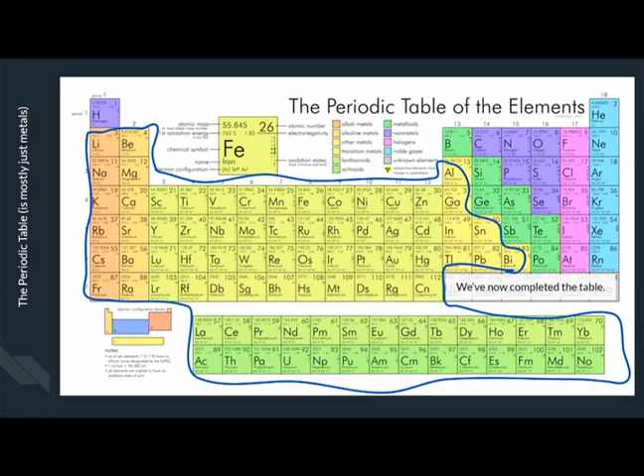There's 118 elements on the periodic table, and this is me, the chemistry teacher. Can't resist putting one of these up here. The periodic table is mostly metals. And so I drew this blue squiggly line just to outline sort of the section of the periodic table that's definitely metals. Then there's this green region in between here that is the metalloids. There's a whole category for metal-like elements, and if you're remembering your high school chemistry, that's sort of where we're going for this first little intro bit. But all of these sections, they would definitely fall into the metals class.

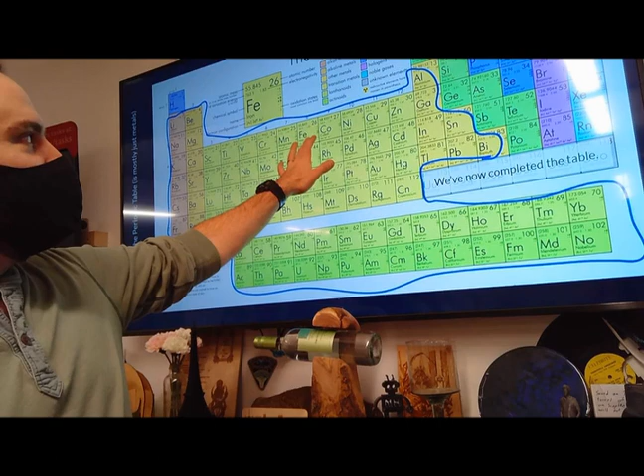So everything in that section, that's going to be the things that we know and love. There's Fe, which is iron, cobalt, nickel, copper, zinc, silver, and gold. And silver and gold are maybe backwards from what you'd expect them to be. Silver is the one with the G, gold is the one with the U. All of those metals that you're used to, even some of the weird ones that you've heard about. Calcium is in your bones. It's a metal that's in your bones. Potassium is necessary, and sodium levels are important to get your brain to work the right way. Those metals are important for moving things around between your neurons.

All those metals are important parts of you and the body, and the way that they work interacts with lots of the stuff about us. But identifying a metal is often relatively natural, something we don't have to think about too much. But identifying which metal it is often more subtle. So it's good to know there's lots of things in the world that are metal. When you think about our planet in general, there's a giant iron core at the center. So in terms of how much of the world is metal, it's a lot, there's a lot of metal on this planet that we're a part of.

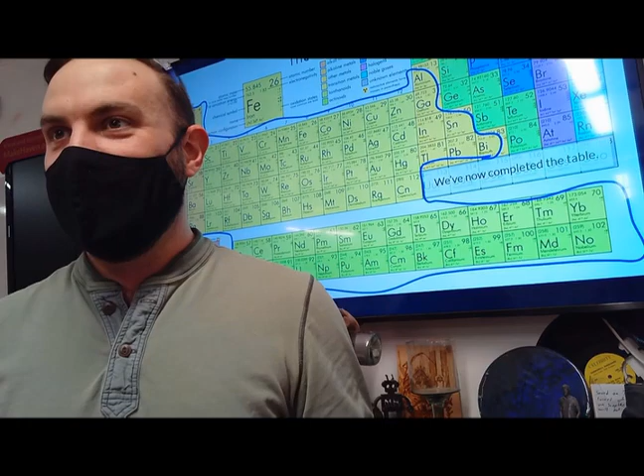If you were watching the news this week, they made a big hullabaloo about an asteroid in the asteroid belt worth 10,000 quadrillion dollars if you could bring it to Earth and mine it for all those metals. But they made a good point that if you actually brought it down to Earth's surface, you'd immediately shut down the economy for each of those metals because we'd have more than we'd ever need. So it's fascinating to think about metals in context, their rarity, their commonality, and how they exist in the universe, the fact that all these heavy elements came to us from the blast furnace in the center of stars. A little bit of context is always fascinating for where these things come together.

But we're going to talk mostly not about the origin of metals, but how you use them and how they fit together. So it's good for us to describe a few things about metals, and the most common of those is iron and steel. There's a whole field of metallurgy that there's no hope for us to get close to understanding in the scope of this course. But there's this giant graph where you take the temperature in Celsius versus the carbon content of some iron, and that determines what exact flavor of iron or steel you have and how that dynamic works.

Then you can think about this in a giant smelting forge scenario where you've got huge amounts of molten iron that you're going to cast into things. You can think about it on the microscopic level where you've got domains and grains that can align or disalign to make magnets, which might sound familiar all the way back from high school chemistry. And then there's the blacksmithing realm, which ultimately we're not going to get too far into.

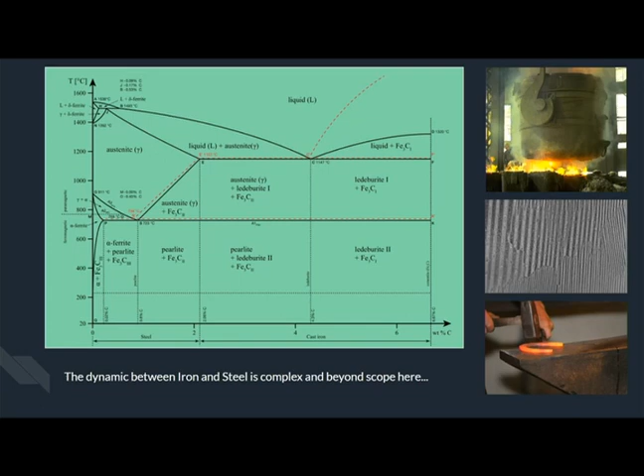It sounds like someone's got a question. That sounded like an unmuted person. A question about this? I'm in, is that anybody? I think someone just joined by phone. Oh cool, is there a question? Oh, we don't, yeah, we'll keep going.

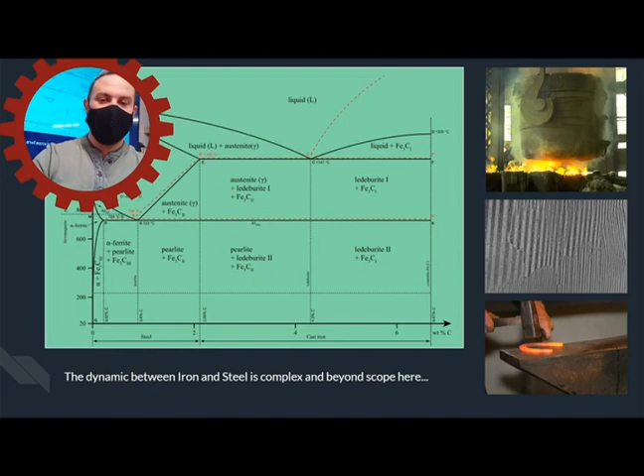The big thing I want to point out is that right now, blacksmithing has become super popular in the pop culture of the world. But as of right now, I don't think there's any real blacksmithing gear at MakeHaven, so that may be a growth area, but we're excited to think about those things. We're mostly going to talk about shaping and machining metals for cold cutting instead of hot forming metals, so that's important to think about. There's a kiln on order that might be available to do a number of things, including heating and cooling metals for a tempering and annealing process. That kiln probably won't make it in time for either of our two metal shop weeks, but it's something to think about down the line for ways you can work with metals even further.

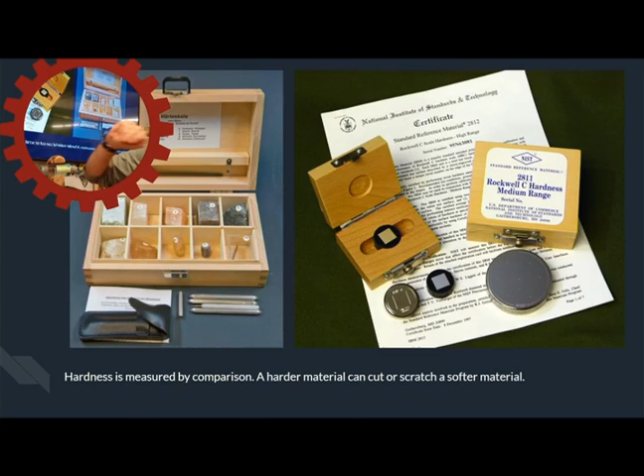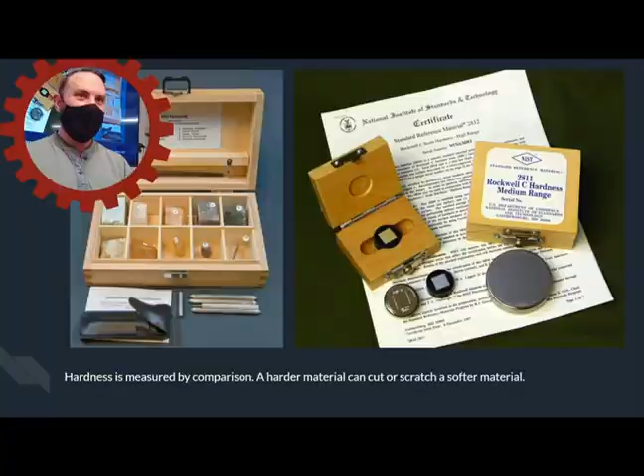If we're talking about metals, there's a few properties worth commenting on, and one is hardness. Hardness is often part of our definition of metals, that we think of them as hard materials. So defining hardness is important. There's even an official scale for hardness, the Rockwell C hardness, or this National Standards Reference Material Hardness Scale, where you can compare hardnesses. If you did college or high school geology, you might remember a hardness lab where you scratch rocks across stone, and some scratch really nicely and others don't scratch at all.

There's a vernacular that nothing is harder than a diamond, that's the hardest material, which means the diamond is going to be tough enough that it will scratch anything else you put it up against. Whenever you're talking about hardness, it's a relative measure. It's how much can you scratch something else is really what we're talking about. So it's an important piece.

It also means when things are harder, there's other implications to that. Having a molecular structure that's really self-reinforcing, really self-stabilizing, builds up hardness and makes for harder things, which is often one of the most identifiable parts of metals.

Now, there are metals that are super soft, like lead. You can bend it with your hand. Or if you're talking about gold, the iconic way that someone would test for a golden nugget in an old-timey movie is they'd bite it, because pure gold is soft enough that with a bite you can deform it.

So there's lots of different things that happen with hardness. For metals, there's some that are very soft, and there's even a few that are liquid at or near room temperature. Mercury is a prime example of the liquid metal. Gallium is another one that's fun, and it's at least not very toxic. You can order it, it comes solid, and if you heat it up, you can get it to melt in your hand. There's some good videos of people playing around with those.

Yeah, I don't know, it did a little hiccup. Oh, there we go, we're back? Okay, cool, cable disconnect, we're back on it.

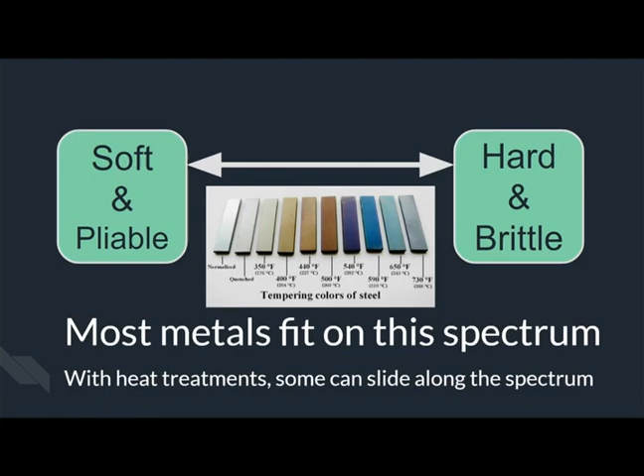I used to have a ring that was tungsten carbide, the hardest ring you can get fundamentally. It's not necessarily the safest ring to wear because they can't cut it off if you have to go to the emergency room. I was told that if it ever broke, it would shatter. So a very hard material will often also be brittle. It may be very resistant to breaking, but when it does, it will chip off and pieces will shatter. It can be a very brittle material.

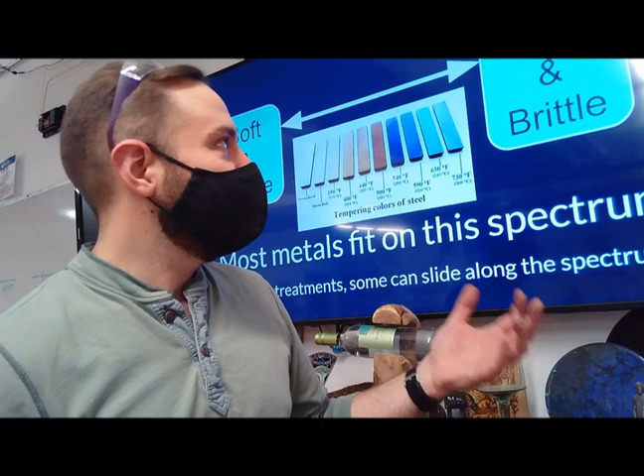Whereas a softer material, you're not as strong, but you get a little bit of motion, a little bit of ductility, some malleability. It will stretch and give before it fails. That little bit of plasticity is often very helpful when you're talking about having materials. So the dynamic between soft and hard is something you want to consider when thinking about your metals and materials this week.

Interestingly, iron and steel is one of the most fascinating on the spectrum because you can actually modulate how hard or soft it is to get the dynamic you want. In a knife, you may even have regions that are harder and regions that are softer. You may want a very hard cutting edge, but the back of the knife to be softer so it can withstand a little bit of flex. On a very high-end piece of material, you can even play with that dynamic some.

But for a lot of metals we might use here, we're going to talk more on the softer side. Like a piece of brass is going to be relatively soft. Aluminum is relatively soft. There's lots of different metals to consider. So I made a list — a big list with lots of words all on one slide. I'd recommend coming back to refer to it if you ever want to. These are probably all metals you know and love: aluminum, brass, copper, pewter, nickel, titanium, zinc, and then the ferrous metals, iron, steel, and other steels.

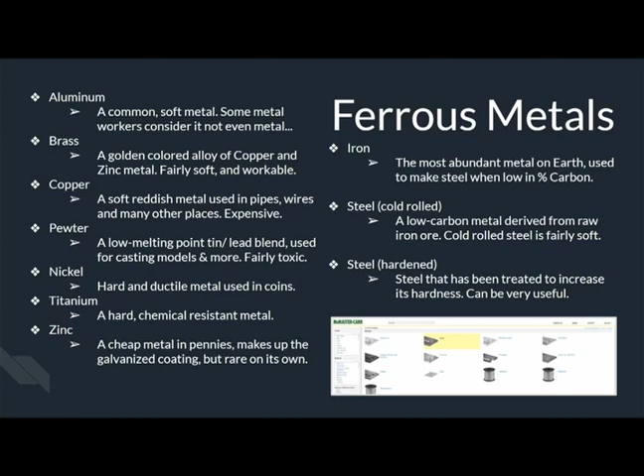But if you ask a metal worker, they may not consider it a metal, sort of like fish is not considered a meat on many menus. It's still definitely got eyes that looked at you if it was an animal swimming around, so I would categorize it as a meat, but most menus separate fish from the rest of the meat. Aluminum falls into that category: yes, it's a metal, but it's very different from others. It's a common soft metal.

Another thing that's interesting about aluminum is that it's extracted with an electrical process that used to make it very expensive. The top of the Washington Monument is actually capped with aluminum because at the time it was more valuable than gold. Since then, it has become sort of the garbage metal, right? You can make a beer can out of it, and then they're disposable, or you get 10 cents for recycling them. Those pieces of aluminum make it very interesting and appealing as a metal.

It's also very soft, very shapeable. Aluminum foil works well because you can bend and squish and stretch it, and it doesn't break. It's got a lot of plasticity. It's not a very hard metal, and you can cut it with basically a perfectly sharp wood tool. It's soft enough that wood tools work just fine on aluminum, although you may want to do it without the woodworkers watching you use aluminum through the wood shop tools. So you got to be a little careful with that, but it is a soft enough metal that you can cut.

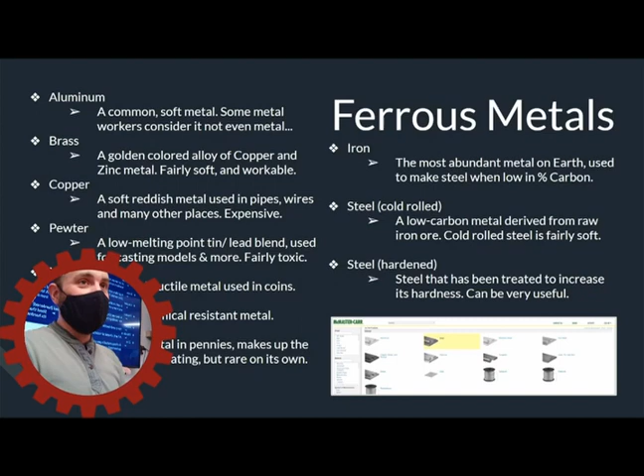Brass is another well-loved one that's similarly workable in woodworking projects. It's a nice inlay. A brass inlay can add a really nice color. It's that golden doorknob that we probably all saw from houses built in the 80s - the brass doorknob piece that if I get a chance, I replace in any building that I occupy.

But those are fairly soft, workable. They've got a nice feel. Some people really like the touch of a brass material because it doesn't wick the heat away from you immediately. But it's a blend of copper and zinc.

And so copper is the next one on our list. Copper is that orangish color that the pipes, many of the pipes in MakeHaven that carry around compressed air, are using, or pressurized water. Plumbing has been made out of copper pipes for a long time.

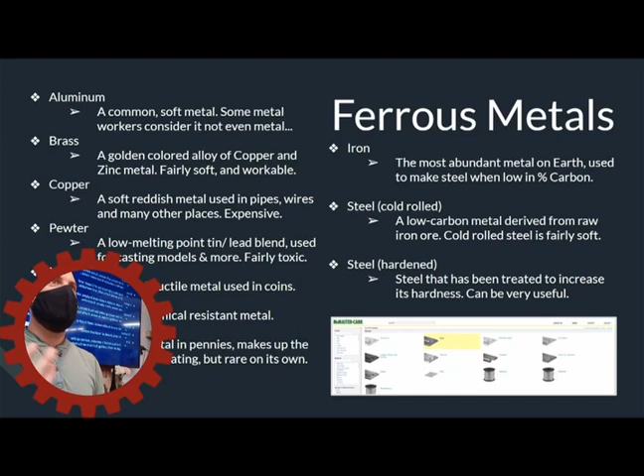Since we stopped using lead. In ancient Roman times, they used lead, which is where its Latin term plumbum even comes from. But copper plumbing has been around for hundreds of years, or at least 100 years easily, and it's a well-used material for that.

It is pretty valuable at this point. So if you've got an abandoned house with copper pipes, I'm sure you've heard of people going into those abandoned buildings and stripping out all the copper piping just to scrap it and sell it for a little bit of cash. So those are all things to take into account. But it has a very nice look - I really like the look of copper.

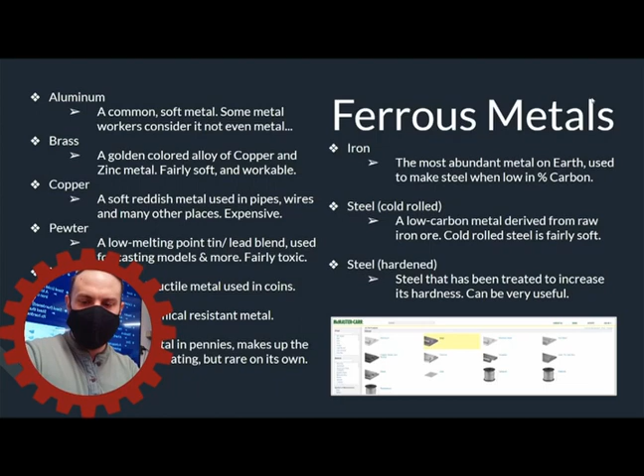Pewter is another one if we're going alphabetically. Pewter is a low melting point tin lead blend. Lead, by the way, is toxic, so I didn't put it on the list. But pewter is often used for casting, and a lot of old kids' toys had pewter in them, where you had a mold, and they would cast molten pewter, and you get a fun pewter soldier shape. Or a little car that was made out of pewter where they could cast them and then create them one after the other. Pewter is a soft metal.

It has a low melting point. The Monopoly pieces were pewter at first, right? And then they stopped because of the lead. Now they're plastic, right? Or no, I think they're metal still.

I mean, I guess the last time I really interacted with a Monopoly set, I was probably like 10. Yeah, no, the last time that any of us have played Monopoly was when we were all 10. So if somebody else knows what the current set of Monopoly pieces are, maybe they're brass. I don't know, that's reasonable. But there are lots of metals that you can use.

Pewter is one that, back when I was in high school, my art teacher - and I think she knew it was bad - had an opportunity for her oldest students to work with some pewter and cast things. So it's a neat metal if you ever get a chance to work with it, although it's probably not on the list of approved MakeHaven things just because of the lead content.

I would need to look before I get too committed to making a statement, but titanium is probably not toxic, it's definitely antimicrobial. So there are those pieces.

Sometimes they do that - like there are IUDs that are copper, and those disrupt the body's process in certain ways, and you can have terrible responses to them if you are allergic to copper. So the dynamic between a metal and a person's body can be complicated, but if you're thinking about integrating a metal in your body, it's something you need to deeply research.

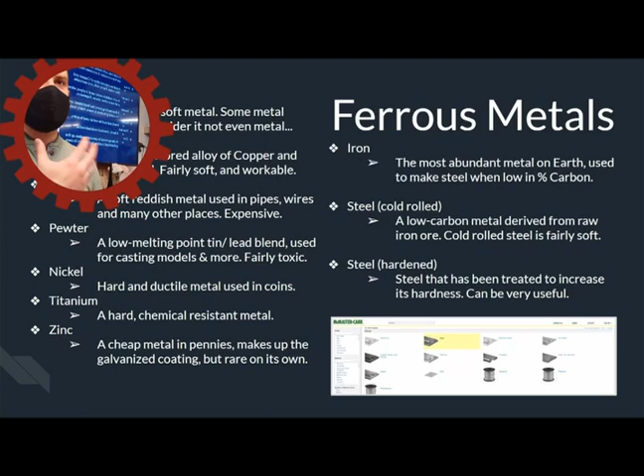And so if you take a penny post some certain year - I think maybe the 80s - and you cut a penny open, which you can totally do, you'll see that the outside is an electroplated copper on the surface of mostly zinc. And zinc actually will dissolve into an acid really readily - it'll make a salt really nicely and then leave.

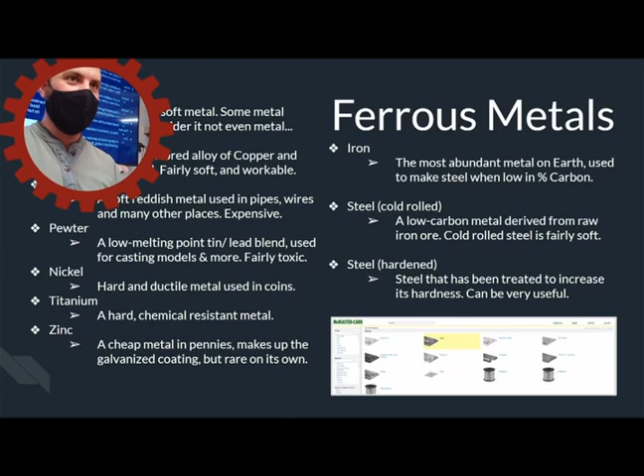A fun chemistry experiment to do with students is to cut a penny open so it's got access to the zinc, then leave it sitting in an acid, a weak acid even, for a few days. It will dissolve away the zinc, and you'll have the copper husk of the penny left over - a very clean Abe Lincoln looking shell, which is kind of neat to see happen if you want a background project going on your counter for a while.

So those are all different metals. Zinc is also used for a galvanized coating. If you have iron or steel that you want to keep from rusting, you can have a galvanized nail, and that zinc is going to form zinc oxide, but that's not iron rust. Iron rust will weaken the material over time, but zinc oxide is fairly stable as a surface material. You're passivizing the metal, and that can be useful.

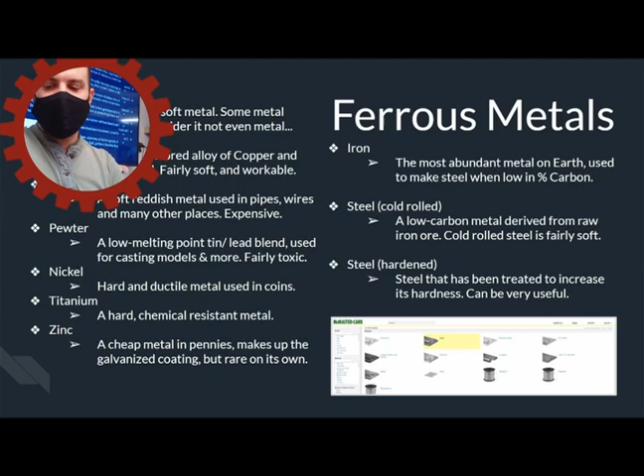Galvanized steel that has zinc on it is super toxic to weld. Good point to make is that galvanized steel is super toxic to weld. So if you're thinking about using zinc-coated galvanized steel and welding at the same time, just stop. You'd need to grind off the zinc galvanized layer, and even then, still probably not worth doing if there's another steel source available. There's plenty of it.

So if we're taking those metals into account, it's good to go through the ferrous metals. Iron's elemental symbol is Fe, and it's a very ancient metal that we've known about for a long time. There's tons of it across the planet, and in its more raw form, you've got iron with a higher carbon content often amongst those iron atoms.

So that is super abundant - you can find it digging things up. It's what many asteroids are made of out in space. It's the final material that many stars will make inside the star's actual atomic fusion core, in the generation prior to our sun. It is a heavy, dense material that is a super common metal on Earth, and it's used very broadly. It's also very workable, and you can change its hardness, so it's super common.

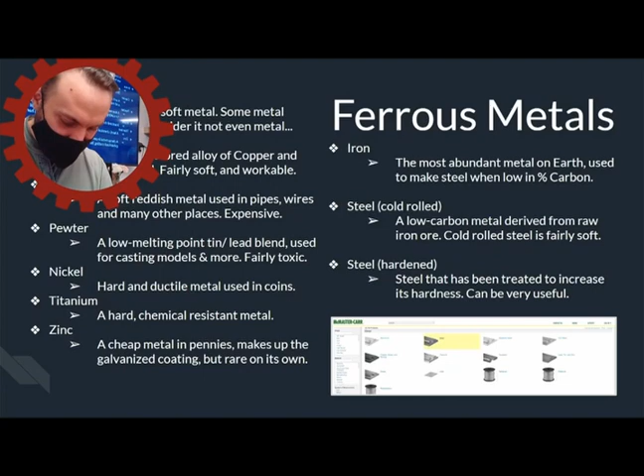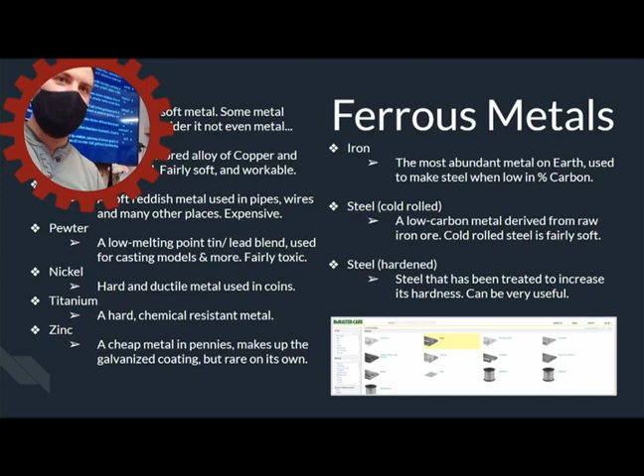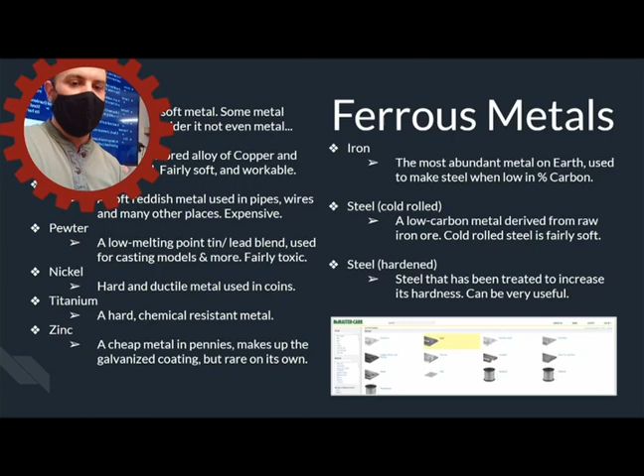Ruby said to repeat that? Oh! Steel is the most popular metal and probably the most workable one. The aluminum, brass, copper, pewter, nickel, titanium, zinc list has got more specialized applications. And so there's a big industry around iron, and each one of the other metals has a smaller niche. They're more rare, they're going to cost you more. And so those are all things to take into account when you're looking at projects and project design.

But this image down here in the bottom right is too small to really see, but it's a link to McMaster-Carr. And so I'm just going to pull this up. This is one of the many, many places where you can source your metals. I like this one just because they're so clear about here are the different metals that we have to sell. These are where you can buy them. This is typically one of the more expensive routes to get your metals just because of shipping and all those sorts of things.

I actually used to live right next to this. So I could walk in and pick up my orders from McMaster-Carr, which was pretty fun in Cleveland.

But the ordering here is actually really good. So if you wanted aluminum, you could come into here and then you can choose what kind of aluminum do you want, what shape do you want it to be, do you want a hex tube, do you want all those other tubes. You can get exactly what you want from McMaster-Carr. But for all of that, you pay a little bit of a premium. It's such a nice ordering website though, and a giant automated factory that is bonkers. So in any case, heading back to...

Can I ask a question about aluminum? And it may be that I'm jumping ahead. No, go for it. So I didn't know that there were classes of aluminum. When I was researching for what I wanted to make, I discovered that there's different grades, if I'm using the word right. Yeah. So that sort of surprised me, and I'm wondering if that's a consideration in all metals, or if it's just aluminum, or if we want to make something that's food grade, considerations like that, and how we go about self-educating on that.

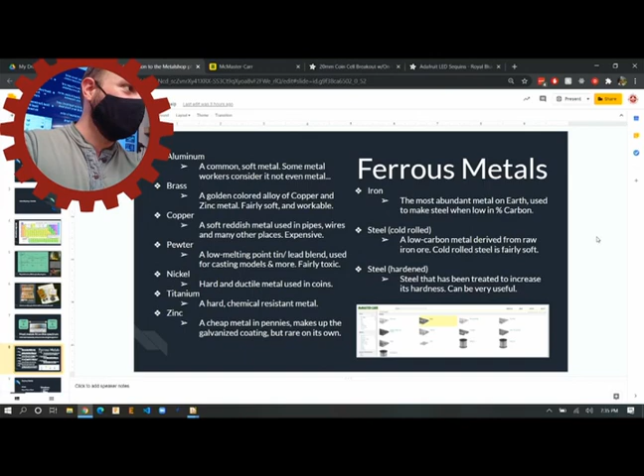But all of these are available, like impact resistant A516 carbon steel. Those are all available if you wanted to pick them out and look through them all. The main goal this week is really to get a sense for those machines and their distinction from the wood shop ones. So yeah, that's a good question and one that we can explore more. I was hoping to cover that a bit more next week as we try and process this a bit further.

But if you're going to buy these things, sheets, pipes, tubes, rods, bars, blocks, or a square tube, particularly for steel, you'll need to find a vendor for those. McMaster-Carr is the vendor with the most options. It's going to take a couple days to get here. Their shipping is good, but it still will take a few days to arrive.

You can pick up metal at any big box store where there's usually a little section off in the corner with all of the hardware for doorknobs and hinges. There'll be a section where you can buy bars or rods or threaded rods, all of those things. Usually you can get aluminum and steel at Lowe's and Home Depot pretty easily. The multi-purpose steel would be soft enough to cut with home-based tools, and we would certainly be able to cut that here. And then there are some metal shops around that do sell.

There's a list I know that MakeHaven has that maybe someone could drop into the chat, Kate or JR. I'm sure one of the two of you knows the name of that off the top of your head. This is where me being new to the area, I still need to learn that. But we could have that list again. I know Kate gave it to us, but it's kind of lost somewhere. Yep, if you could drop that list in the chat again, cool. Oh, great. JR did. So then there's the list of the local buying options that are available too.

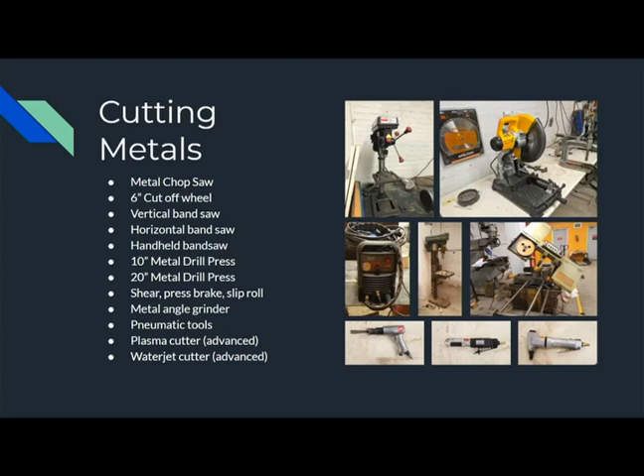So let's talk about the metal tools. What are the tools that we have in the shop that are super approachable? These are things that will make sense very early this week as you're trying to do a project. These are great tools to get your hands on, just to get started with. The big distinction is that they are leveled up in terms of power from the wood shop tools. Every one of these machines is very similar to its wood shop counterpart, but the motors are bigger, the gearings are more aggressive, and there needs to be more power to make it through the metals. And so you've got a different dynamic that happens there.

In the wood shop, sometimes you'll hold down your materials, and you'll find that with all of these metalworking tools, there are clamps either built in or slots to put a clamp right there. Because if you're working with wood, you are only slightly softer than the wood. But on the softness hardness scale, the metals are all much harder than you are. So if a piece of metal goes flying off one of these cutting machines, it will not hesitate to go through you. So you've got to be a little bit safer and more conscientious. It's why this came after all of the woodworking stuff, so that you had a little practice with the woodworking tools. But lots of the things are the same.

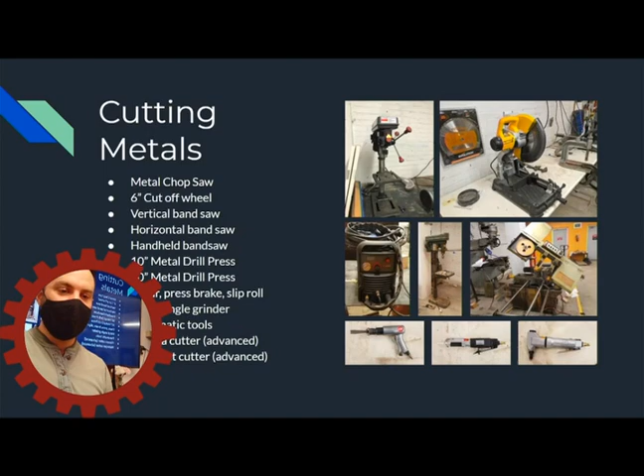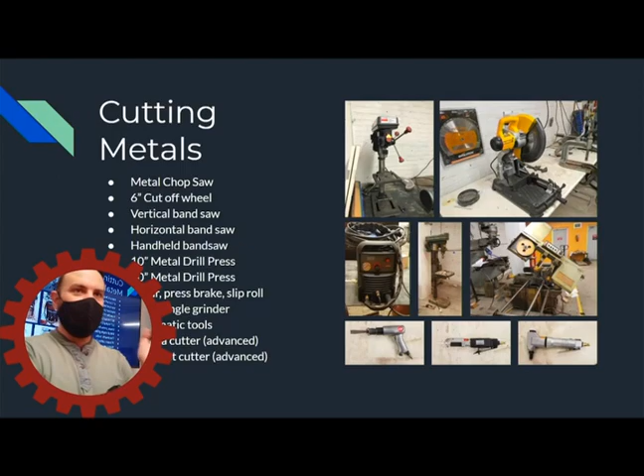So it's sort of analogous to the compound miter saw. You've got the metal chop saw, which is this guy over here. And so it feels very much the same as the compound miter saw. No compounding side to side on the saw, but you can definitely tilt the workpiece. The fence is more adjustable, but the saw moves in a consistent pattern. There's a smaller 6-inch cutoff wheel that's like a mini version of the same deal. It has an angle grinder cutoff disc that it's using to make that cut.

And then there's bandsaws. So bandsaws also work. What I've got depicted here is the horizontal bandsaw, but the vertical and horizontal bandsaw, they both will work pretty much the same way as the bandsaw in the wood shop. The vertical bandsaw is very, very similar, but you do have to think a little bit about getting material on there so that you've got at least a few teeth engaged with your piece of metal. So it's really better for thicker metals rather than sheet goods.

Sheet goods you want to snip with shears, because a thin metal you can often cut with real heavy-duty scissors. And so you can get some good work there. A bandsaw is for slightly thicker stock, 1/4 inch and a little bit higher. You want to have a few teeth engaged when the bandsaw blade is going through. And you want to have larger teeth for aluminum so that you can scrape out that material. For steel, you're going to get smaller teeth that nibble their way through.

And so the blade that was in there the last time I looked was a steel cutting blade. The teeth are very small. If you wanted to cut aluminum on the bandsaw, you may have to change out the blades. So you'll want to take that into account.

The horizontal bandsaw, if you can get a chance to get badged on that thing, it is a dream. It has a clamp to hold the workpiece and an automatic feed feature so that if you would like to have pieces of metal cut, it will cut your piece and then it'll retract the saw out of the way and then push the work forward until you get a second and third and infinite number of exactly identical cuts. It's an amazing tool that it's able to do all of that all in one go. It's super high-end. It's great that we have it.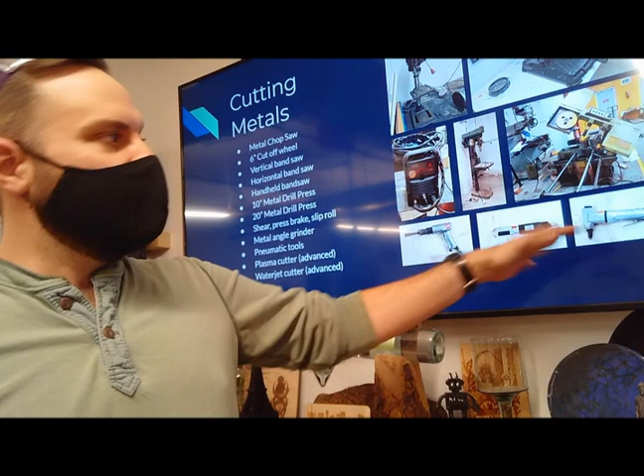So you can get shaping and cutting from that one tool. We'll look at it again, I've got a picture coming up in a bit. There's also other handheld tools, like a metal angle grinder. There's a whole class of pneumatic tools, depicted across the bottom, where you use air instead of electricity to power these tools. It can be helpful, especially if you're running coolant over something you want to cut, to have air powering it, so you get an air line and drive these tools that way.

There's pneumatic shears, which are really interesting. They'll make cuts for you, so all you need to do is drive them forward in the direction you want the cut. You have a little bit of play, you can make a bit of a turn with that, but these air-powered cutters are a neat tool to have if you're cutting up sheet goods.

And then there's also a plasma cutter and a water jet cutter. Those are totally available in the metal shop. My first metal badge at MakeHaven was absolutely the water jet cutter. If you have experience with vector design, it can be a good place to start. If you're already a pro on the laser or the vinyl cutter, it can be fun to get in there and try cutting materials that way.

A neat thing about the water jet is that fundamentally it can cut anything—maybe not wine bottles successfully, Kate—but it does cut lots and lots of things, and it does so really nicely. It can cut metals, it can cut stones. With sheet goods you have to be careful not to get too much wobble, and the software for it is a bit wonky, but it's a neat one to try.

It's good to get a badge on if you want. The badging process can be a little long, and you'll want to reach out to the person doing that badging pretty quickly if you want to get that badge to happen. But it's a fun one, and we'll cycle back to that when we get to the computer-controlled cutting section of the course. But if you wanted to jump on that right now, you totally could.

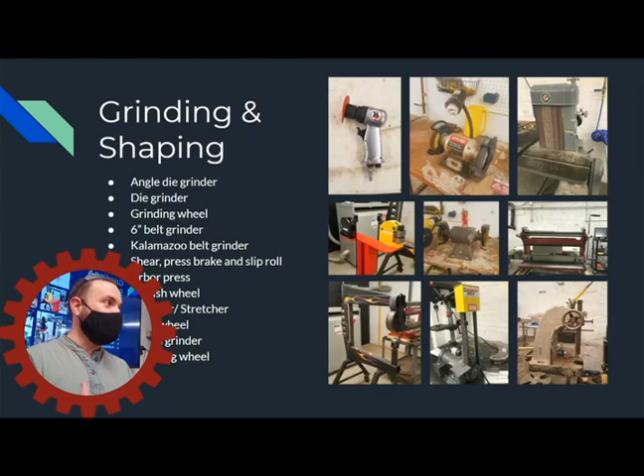Those intermeshed pieces instead get ground off, so you're taking them off in chunks. Or if you make a cut with the bandsaw, you'll have pieces that don't sever a fiber, so they're still attached by a little bit. You'll get burrs on the end of your cut, and those burrs can be very sharp.

If you did any computer maintenance back in the 80s, those big, lightly off-white tan colored computer cases you maybe saw in your parents' home often had not deburred innards inside. They were made out of sheet metal that was folded, but it was often pretty easy to cut yourself on those because they hadn't softened the edges—they hadn't thought that people would be inside maintaining them. They thought of them more as appliances.

Inside of a microwave, that's still pretty true—they're not really meant to be serviced by somebody who doesn't know what they're doing. Whereas now there's an entire hobby computer building sector where they expect people who aren't aware they're going to cut themselves to open those things up. So in any case, when you make a cut on metal, you often get a sharp edge. There's an entire category of tools you can use to soften those edges, to break the edges, or to shape things without needing to make a cut. Because metals hold their shape really well, that can be very useful. So the first section of these is for grinding.

So there's the angle grinder. You've got an angle die grinder, which is going to just sort of spin and make some cut. You've got a die grinder. The angle grinder in general, there's an electric one that you can use to cut and sort of remove material.

The grinding wheel is in the top center here. This guy is a wheel that spins. From my childhood, I remember lawnmower blades being sharpened on that thing, and that was it. But it's useful for many more purposes than that. I saw JR making some lathe tooling with the grinding wheel just yesterday. So those grinding wheels can be broadly useful.

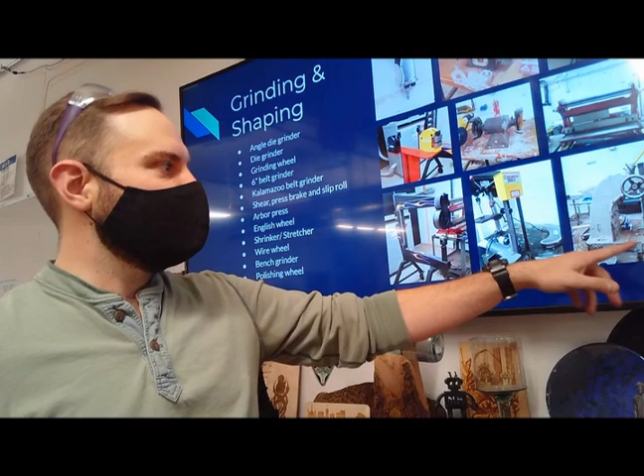There's also the Arbor Press, an interesting one. It's this guy down here in the bottom right. Essentially it's got a big gearing on a wheel and then a lever arm so that you can apply a lot more force than you would be able to by hand. So if you couldn't bend a piece of metal, you could throw it in an Arbor Press, and the leverage and gearing will help very much in your favor, letting you bend or deform something. Kate used it to crush a piece of plastic. You can apply lots and lots, I'm tempted to say a ton of force out of an Arbor Press, but I don't know the exact number. So it's a lot of force you can get out of those things. They're a great way to really squish on something if you need to.

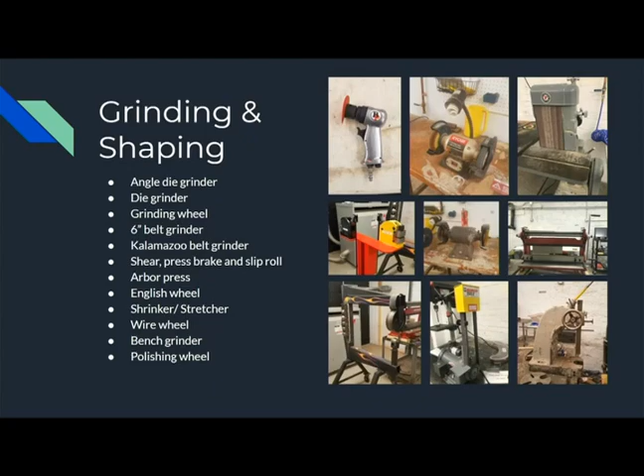Other good tools are the English wheel, and that's this guy with the flame detail. The English wheel is a neat one because you can press materials against two wheels. Based on the contour of those wheels, you can stretch and squish a sheet good so that you get an interesting shape. So imagine building custom car parts where you want a nice gentle curve, a swooping motion across it. You can use the English wheel to work that shape into sheet metal so that you get a nice easy curve into things.

And in that same vein, there's the stretcher shrinker, which is just above. It sort of nibbles its way through the metal, crimping it in just the right way that it makes it either a little bit bigger or a little bit smaller so that you can get a gentle, detailed curve across the surface. But mastering the dynamic of both of those is definitely something that would take a long time to get used to. Learning how exactly you use the wheel, where you move it, how that goes, is going to take some time and some finessing.

It could be great to practice and just take a piece of flat sheet metal and turn it curvy for the time being. But if you wanted to build curved metal art, it would really take a while to get used to bending and moving on those tools.

Then there's the bench grinder, another one of these wire wheel bench grinder sorts of deals where you've got essentially a giant motor in the middle that's spinning two wheels on either side. You can change out those fittings - sometimes they're grinding wheels, sometimes polishing wheels, which is really fabric with a rubbing compound. And then you've got wire wheels that can also take off little bits of surface material, wearing down the wires over time, but also take off surface rust on a piece of metal.

So if you have something that's rusted but you'd like to restore it - I saw somebody do that with plumbing just yesterday. They had a rusty pipe fitting they wanted to reuse for a decorative piece, so they just ran it through the wire wheel to remove all the rust by knocking it off one piece at a time. The bench grinder and polishing wheel all fit into that category, and they really work well together as a whole unit.

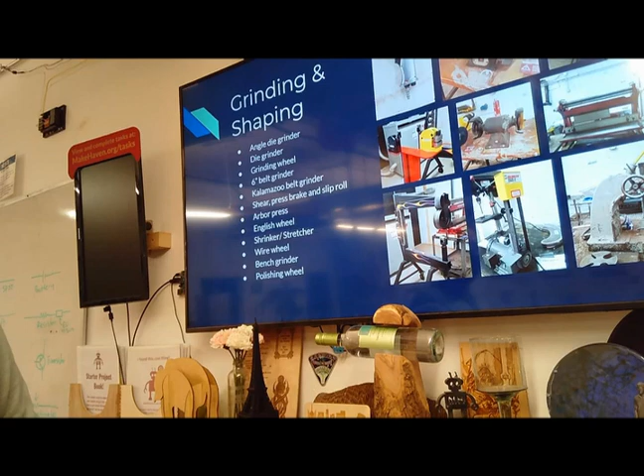What is the distinction between the grinding wheel and the bench grinder? That's one I think shows up differently in the list of MakeHaven things, and I was actually wondering that myself when I was looking at this list this afternoon. I think there's probably not much of a distinction - yeah, they're the same thing. The grinding wheel and the bench grinder, I think I just put them on the list twice. There's several of these things that have adopted multiple names. Naming in metalworking, especially when you get into the machinist realm, there's often many, many names for things, because they were developing this technology at a time when people loved to categorize. So lots of these things have multiple names - I probably just put it in the list twice.

So if these are for cutting, and then we have grinding and shaping, the next one would be to fasten metals together. There's lots of different ways you can do that with fastening tools. There's tap and die tools where you'd cut threads into a piece of metal so you could put a screw or a bolt into it. The tap and die are the two sides of that.

Think about it - one would make the threads on a nut, and one would make the threads on a bolt, and those two mate together. The tap is to put the threads into the nut part, the female end, and the die is to cut them on the screw, if I'm getting those right. But they're almost always a set to put together, so a tap and die set is a really common thing to have, and we definitely have some in the metal shop.

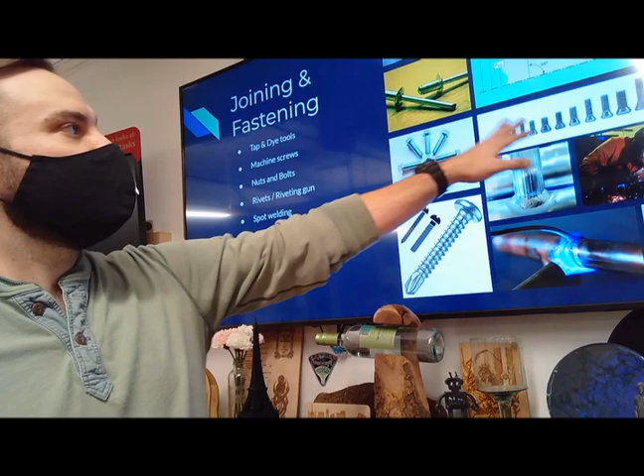Then there are machine screws, which have smaller threads shown here. These are bolts or machine screws - they have finer threads than a wood screw. You've got down here another example of a screw - this would be a self-tapping screw. The thread pitch really is something important to take into account.

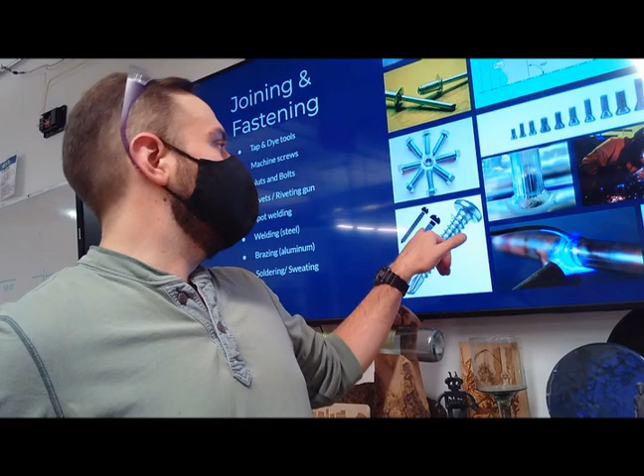Thread pitches were standardized a long time ago when the first lathes were being built. It was decided and very nicely kept to a standard, so a 60-degree pitch on a thread is pretty universal. The threads per inch varies quite a bit though - you've got tighter pitched ones, which I'd call machine screws, and bolts that fall into there too, where your threads are much finer. In metals, the material's strong enough to take all that strain on a smaller thread. A wood screw has a larger thread because it needs a better grip further out into the wood, giving more compression of those fibers to get a similar amount of strength.

So you've got those things to take into account when thinking about the different types of screws and bolts and how to make sense of them. There's also a really common size, 1/4-20, which means it's 1/4 inch in diameter and 20 threads per inch. You'll often find bolts listed with these two-part names, like 1/4-20 or 440 or 1032, where the first number refers to the diameter of the screw or bolt, and the second number refers to the threads per inch.

A common one is 1032. A number 10 screw is a 3/16 diameter screw. Not that you'd need to know that directly, but it's just a fun factoid.

There's 1032 and 1024 thread-per-inch screws that have the same diameter but different threads per inch. In the 1032, the threads are much closer together; in the 1024, they're a little more spread out. They have different thread counts because they might be useful for different things. 1032 is finer and needs more control to make; 1024 is a little easier to get in and out. The threads are often the same thickness, it's just a matter of how much spin and how much grab you want.

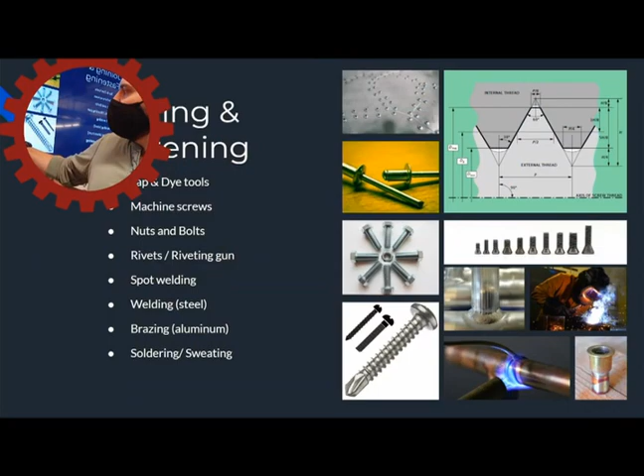This little example piece of copper down here in the bottom has a brass fitting, and you can see all of this silver is from the solder that was placed in there. So you can see the solder line coming in, and the flame torch that you'd use to wick that solder in between the pieces.

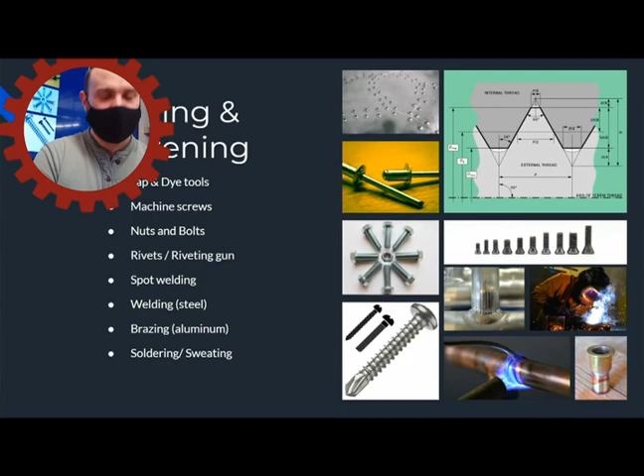What's up? For brazing, are you talking about connecting two pieces of aluminum, or are you talking about aluminum as the connecting metal? Gotcha. So I'm familiar with brazing steel, where the brazing rod would be bronze.

Okay, let me repeat the question. The question was, for brazing, am I talking about aluminum being bonded, or aluminum being the brazing rod? In my situation, I was talking about an aluminum brazing rod to bond aluminum to aluminum.

It's something I've done once, marginally successfully. I'm not a pro at brazing, but it's a process I wanted to make sure I listed as an available option. Ada, I'm sure your jewelry work has you far more experienced. I've never done anything with jewelry, but with sculpture stuff.

Jeffrey, one of the facilitators, made a large aluminum frame, and if you were in here a couple weeks ago, there was a day he was walking through with an 8-foot tall frame that he had brazed together with aluminum. So instead of MIG welding steel, he was using a specialized MIG torch to braze aluminum pieces together—using aluminum to bond two other pieces of aluminum together, which can be a really nice process.

You can do that with steel too—I mean, not with aluminum brazing rod, but with making... Yeah, usually if you have a longer question, you should come up and say it to the mic, in general. But yeah, you can use aluminum to connect other materials also, and you can use aluminum to connect steel. There's tons of options, if you would like.

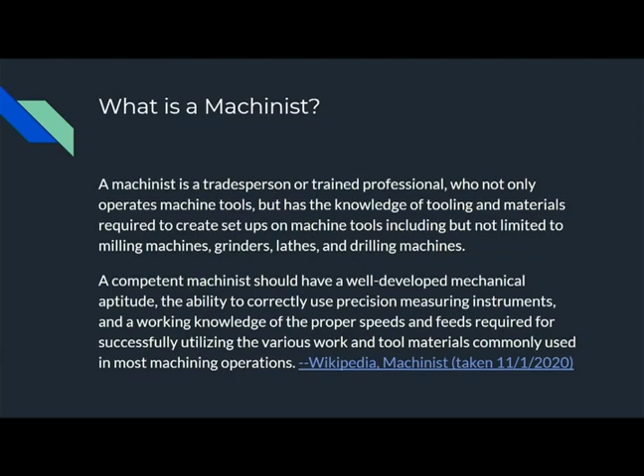In Cleveland, this was often a common career path for many of our kids, that they knew that they could get a job as a machinist. It's a good living. You can really enjoy what you're doing. I had several friends who would be machinists for the airline and military, and so they were building things to very tight specifications, very high quality machining, and it's a great paying job.

So this is an entire category of careers where you can be a machinist and you can become a specialist on one of the machines if you really want to, or you can master several of them and be able to produce on a larger scale. Several of our facilitators, at least Jeremy, have experience in a machine shop. They've got that background, which is neat to ask them questions, pick their brain, and get some resources from them to understand all these things a little bit better.

But the lathe has been around since ancient times. Not the metal lathe, but the lathe in general, where you just get a piece of work to spin. But these metal motorized ones came about in the 1700s. There's some really fascinating videos I'll share about the history of the lathe. From the first good lathe, all of these other machines have been built and born. So it's an interesting dynamic to think about them all coming out of the lathe.

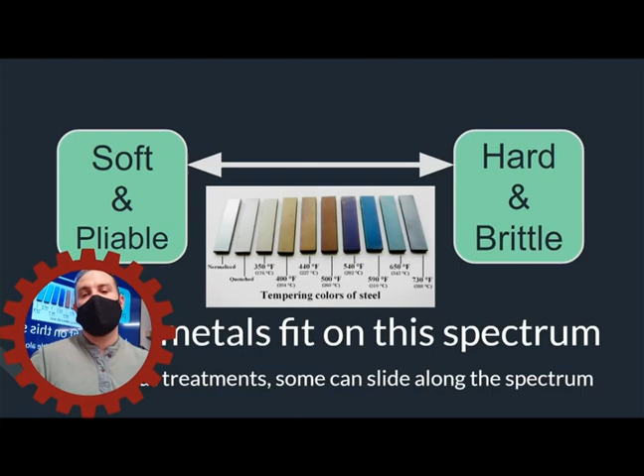So if you use tools on a mill, on a Bridgeport or a CNC, we have a sharpener for those, so that if you're making cuts and your tool does get dull, you have a way to resharpen that. And so there's a whole sharpener that we have in the machine shop that you can use if you want to sharpen one of those things. Then there's also a whole suite of measuring tools.

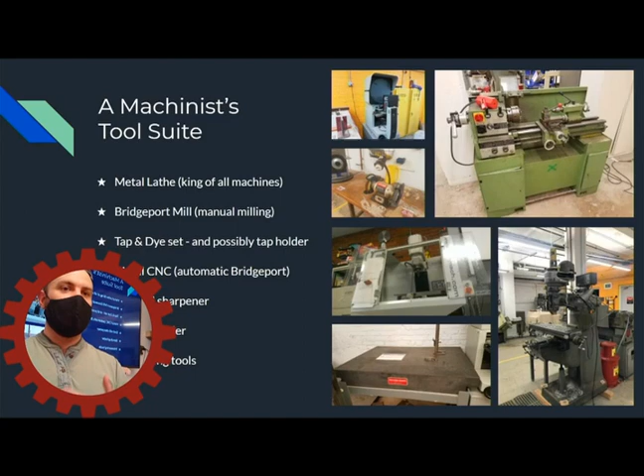And it's important when you're doing this to think about what are the pieces that you want to go after? Like, what are the things that you want to build? And we're going to get to example projects in just a minute. But because of the detail that goes into metalworking and the research that it takes to get to the end point, there are some safe, easy ones where you're cutting out shapes and then welding them together. That's a fairly quick skill to acquire.

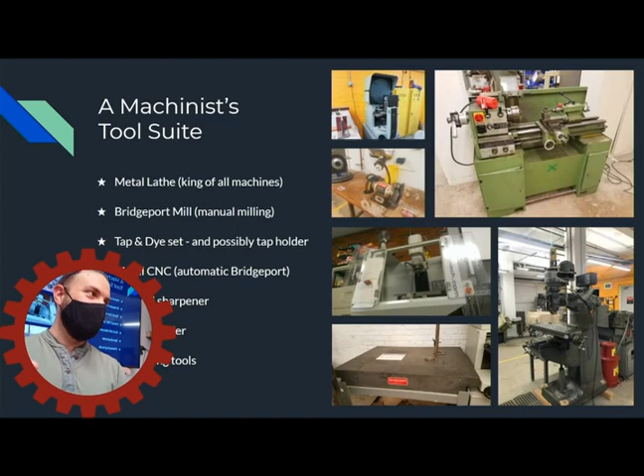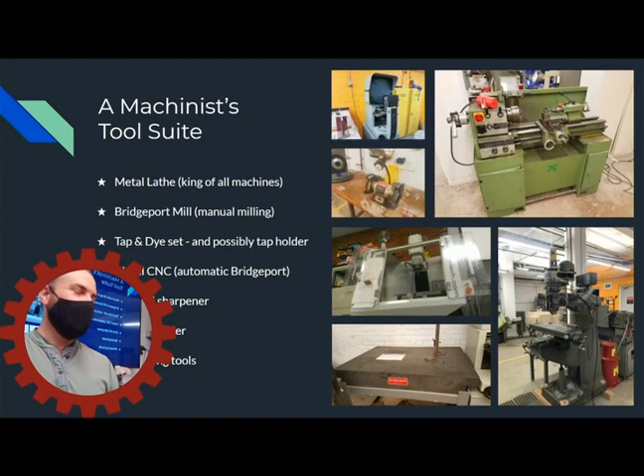But if you want really fine-tuned control of a cut, that's going to take more effort than you think it might. And so the projects that you do as an early machinist are often far simpler than you think they would be, right? In the metal lathe class, we turned a step-down cylinder. So we turned it to a certain specified diameter and length, and that was the day-long class, learning how to do that.

You may have a goal or an idea of what you want to make out of metal, but depending on the particular set of materials and how you're going to need to process them, you may want to think about, is this the right scope for the week? And so don't pick something that's too big and out of range.

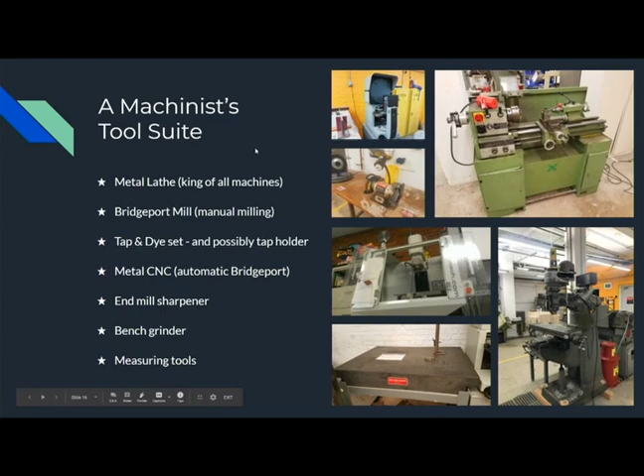But Corey, we've lost your sound. Oh no. Sorry, I'm working on it. Oh, JR's working on it. Just trying to get the video back. Yep. Can you? Oh, hold on. I can unmute. She's got it now. Okay, cool, you can hear it again. Okay, good. It was just crashing and restarting. Gotcha.

Okay. So with metals, there's a lot here that you'll want to deburr, and they are different from other materials. Ionic bonds in salts and crystals, or covalent bonds in diamonds, have a lot of strength in a tetrahedral shape. Metallic bonds let electrons pass freely, and that's what makes them so conductive. So part of the nature of a metal is that it lets electrons move around, but they're very close together. You get lots of burrs because there aren't fibers like you see in wood, so when you get a cut, it can be a very clean cut.

A burr is always going to be on the edge of a metal cut. So you'll want to take that into account. Even if it's a very tiny burr, you'll probably want to grind it off at the end of the processing. So let's talk about personal safety. It's an important part of working in a metal shop. You'll want to make a few choices that can really make your time a lot more pleasant.

You're going to want to choose non-synthetic clothes. You'll want to avoid hanging sleeves, tie back hair if you've got lots of hair, and wear impact resistant goggles. So those are the goggles that are in the drawer right in front, or Z87s, or what we'd always tell our Science Olympiad kids: chemical and impact resistant goggles, Z87 plus.

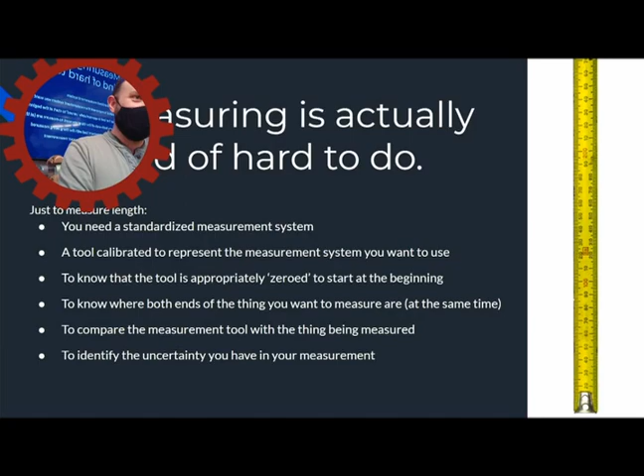And so you'd think about all of the different pieces you need to have. You need to have a measuring system that you can agree on. In French Revolution France, there were 215 length measurements. 215 different systems of measuring length, which is insane. And that's probably even a small number, misestimating the amount there were. So we all now have the metric system, or the American system, which, fun side note, is based on the metric system. America just doesn't tell you that. But the inch is officially 2.54 centimeters.

That's its definition. And so you have a measurement system that you can use, a tool that's calibrated to that measurement system. You need to know how it zeros. Like in the case of a tape measure, this thing on the end slides because the thickness of that end piece matters. So it pushes in if you're measuring up against it, and then if you're pulling from that end slider, it needs to slide out. So the thickness of that little metal tab is taken into account for the zero on the tape measure. So knowing where your measuring tool starts may be a sneaky part of how it works. Most people don't know that that's why it slides back and forth on the tape measure. But it's a fascinating piece just to know that that's how it zeros.

If you're measuring something, knowing where both ends are at the same time may seem like a silly part to have added, but if it's moving, that's very important. Or if you've got something round and you want to make sure you're getting a diameter, knowing you're lined up to that exact diameter can be really important.

Then you need to actually do the comparison between the measuring tool and the thing you want to measure, and identify what uncertainty you have. How much do you know that the length is 3 inches if you measure it with a ruler versus a micrometer or all those different measuring tools?

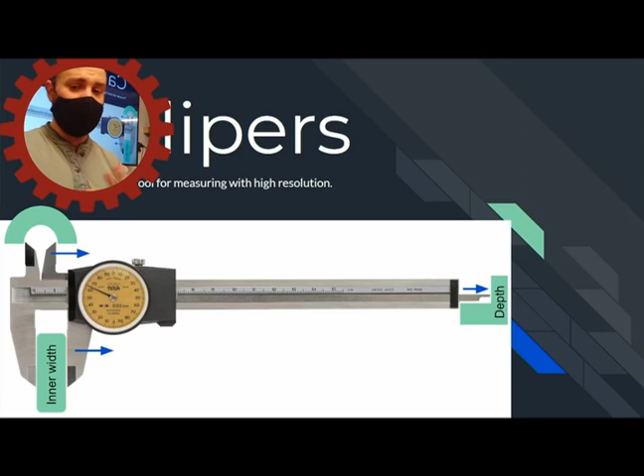So in the metal shop, I would invite you to try calipers or micrometers. Some people use different words for these, but calipers is the name I'm going to go with. They have 3 good forms of measurement: you can do pinching between these teeth, these teeth on the other end spread out to fill a gap, and then there's the depth measurement over on this side.

This is a dial caliper. It's got a big dial in the middle, so understanding how to use those, I'll push out a video over the next tonight so you can see how to use a dial caliper. There's also digital calipers, and then there's sliding calipers.

Each of them is slightly more or less accurate, but they're measuring in the 1,000ths of an inch very often, so you get really nice measurements. They're usually limited to about a 6-inch throw, so you can't go with something very large, but you can know the length of something really well if it's under 6 inches.

That sort of sets a scale for if you wanted to try and build yourself a scoped dimensional project, it gives you a reference point.

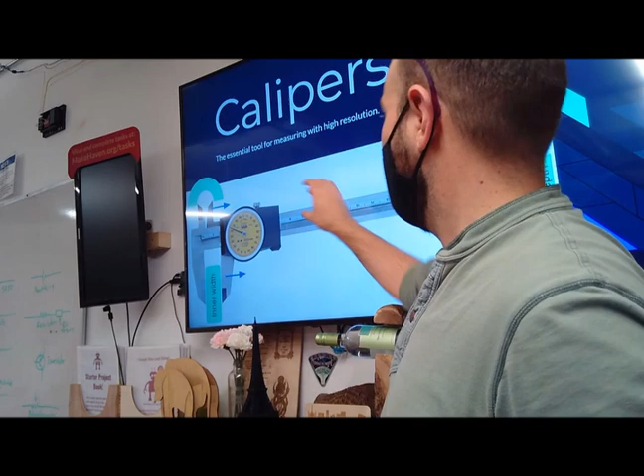Just playing around with one of these, I marked in blue arrows all of the parts that move. All of the ones that don't move aren't marked with an arrow. So the actual body and this upper tooth and that tooth stay fixed. The other ones slide together as one unit so that any one of the 3 could be used to measure at the same time, all off the same gauge.

They're a pretty ingenious little tool, and I would solidly recommend, if you don't have one, getting it. I have one at home that is just personally mine, and it's great. I'm very glad that I have a nice one.

So, some starter project ideas. A good thing to consider when thinking about a metalworking project especially, of the different areas, this is one category of MakeHaven where I've seen people really do a lot of dog fooding, which is building things that you're going to use, using the shop to make the shop better.

If you're trying to build something where you want to make a quick comparison, an example I have linked is from Adam Savage, who made his own tap and die straightener, a tool to hold your tap and die straight up and down, built for himself to use in the shop. Dog fooding is often that.

A good example is Google built Google Meet so they could have discussions across their different locations. They didn't build it for all of us to use in the midst of a pandemic. They built it so people in Boulder could talk to people in San Mateo, and then the rest of us got to use it after they did some dog fooding. There's actually an entire Wikipedia page on dog fooding, or eating your own dog food, using the things that you make.

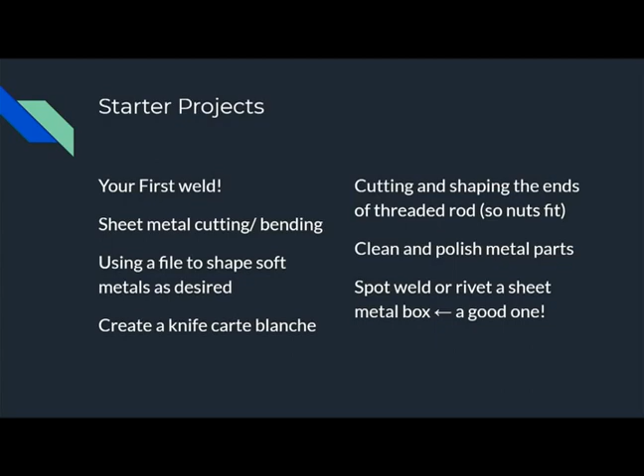But some good starter projects - things I would recommend, although you might have something else in mind that you should totally go after. Just getting your first weld in would be a good project for the week, just to get in there, make it happen, put a few pieces of metal together.

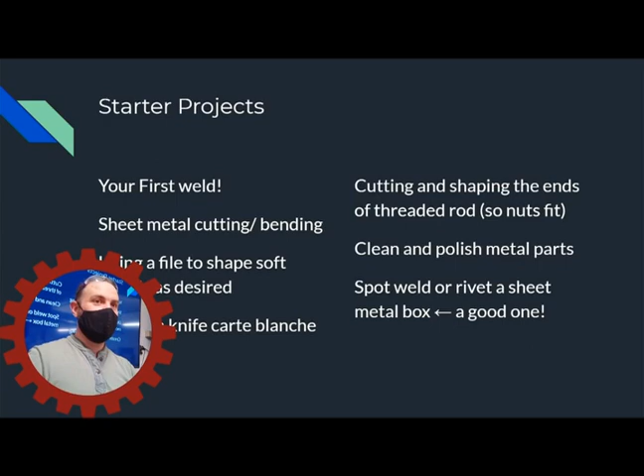And if you have a broader plan, that's great. If you just want to get good at welding, it's an entire career to be a welder - you can make 90 grand just welding things together. So just starting to get relatively good at it over the course of the week could be a useful project in and of itself.

Sheet metal cutting and bending, using a file to shape soft materials into very ornate shapes could be really cool.

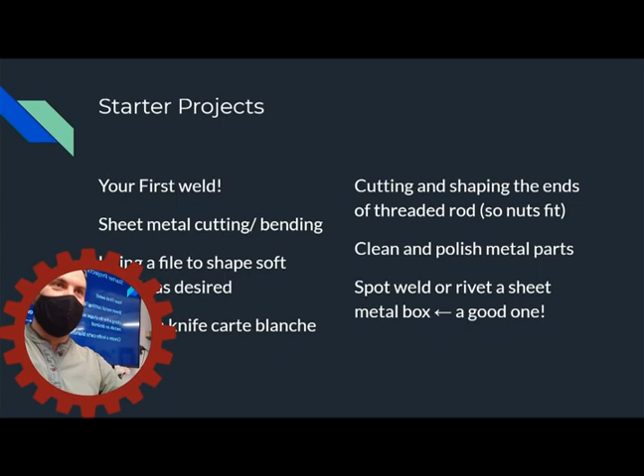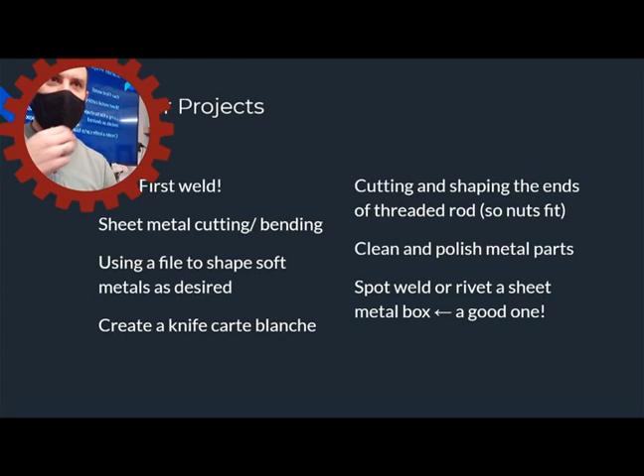If you're really trying to master that fine-tuned thing, think whittling but in metal, using a file. Making a knife from a blank starting point would be a really interesting project. It's fairly complicated and would take a lot of research, might take up the whole two weeks to build a knife. Cutting and shaping the ends of a threaded rod is a great place to start if you're brand new to metalworking and a little timid. Get some threaded rod and matching nuts, make the cuts, then shape the ends on a grinding tool. You'll learn a lot through that process, like how to deal with chips and sparks coming off, and how not to jump away. There's a lot that can come from what feels like a basic project.

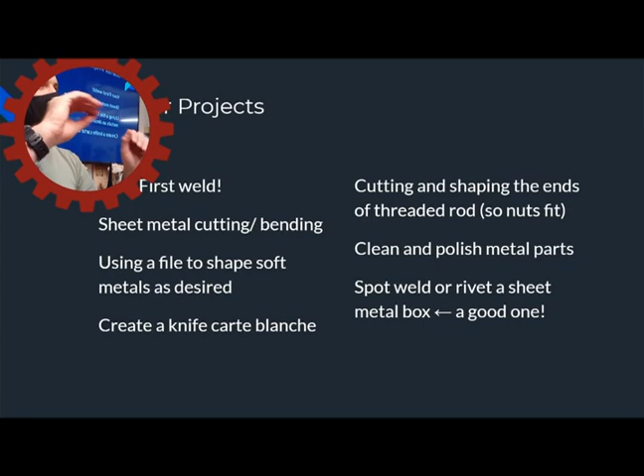Cleaning and polishing is really a good process to get started with. And spot welding or riveting a metal box out of sheet metal is another good one to go after, because you'd need to make your cuts, think about how you shape the geometry, deburr the edges so it doesn't cut you when handling it, and then put in rivets or spot welds to hold the box together, like to hold pens on a desktop. Not anything seemingly fancy, but it practices a lot of the skills going on inside the metal shop. Those could all be reasonably scoped projects.

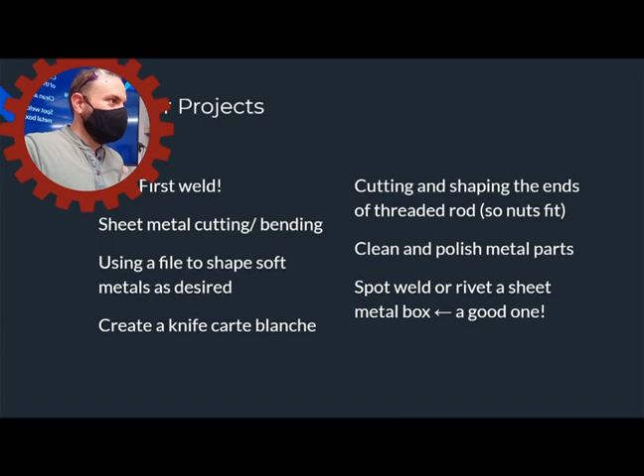Question: how can we make an aluminum box if we can't use aluminum with spot welding? So I would say a rivet would be a great way to go. You'd want to take a look at the details exactly, because I think you might be able to spot weld aluminum, I'm not sure.

But you can definitely rivet aluminum sheet together. So if you buy an aluminum sheet of reasonable thickness, you line it up, drill a hole, and put in a rivet to hold it together. You can get a nice riveted-together box.

But it looked like you were... come on up and tell us that, you've got a lot of info to share. You can weld aluminum to aluminum. You just can't weld aluminum to like steel or even to things like copper, because it has a much lower melting temperature. Its melting point is maybe around 1100 degrees Fahrenheit.

And like copper, silver, gold, depending on the properties, they're all going to be in the 1400 range, and steel is going to be over 2000. In order to weld, you have to melt both pieces of metal you're attaching -- that's the definition of a weld -- and flow them together. So the aluminum would be completely liquid before you even melted the edge of the steel. So you can weld aluminum to aluminum, it's just much lower temperature, so you're using slightly different tools.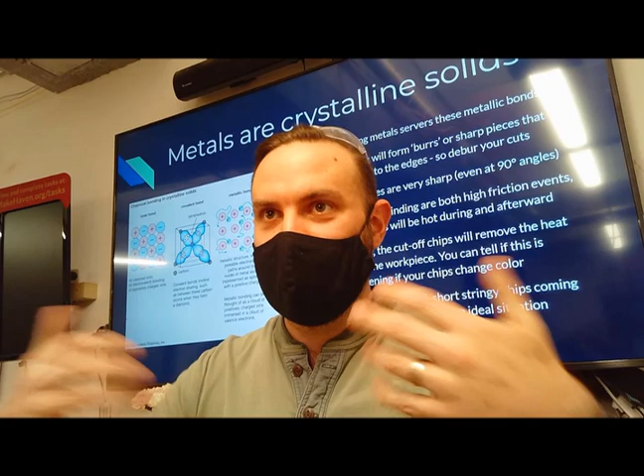You can have sort of a temporary bond, but the strongest is going to be a weld, where everything's melted into one piece. Having full surface-to-surface contact is certainly enough that we use it for pressurized plumbing—that's often a very strong bond—but welding is a stronger bond. It would be used for structural pieces, whereas you wouldn't want to sweat or solder for a bridge. Those pieces need the stronger bond of actually fusing the metals together.

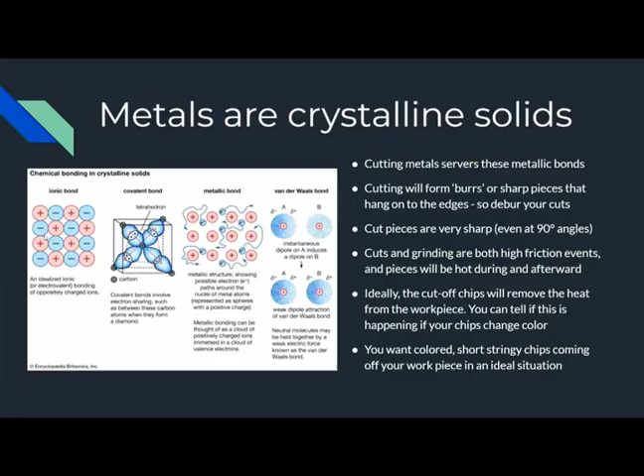There's tons of stuff to get into there, and there are people who talk about all those things for a long, long time. There's tons to know. When we go through that definition of a machinist, it really takes in all of those pieces and that knowledge base to make it happen. As we're dipping our toes into the metal shop, it's good to get started with that work and wrap our minds around it. But you can definitely go way deeper and become an expert in those areas—it will take a lot more knowledge than you might initially expect.

So here's what's next week, but I want to make sure we have time to talk about it. Next week we're going to cover tempering, lathe and milling basics, a CNC conceptual overview, water jet cutting, electroplating, and more about the welding and brazing dynamic—going into the exact how. You may not need to know how it works to just get a badge in MIG welding and do some welds, but getting the theory behind it and the difference between those processes we just previewed is definitely a good thing. We can talk about that more next week to make better sense of it all.

So there's a lot more to learn. But what I want to do is make sure that we get a chance to talk about what happened this week.

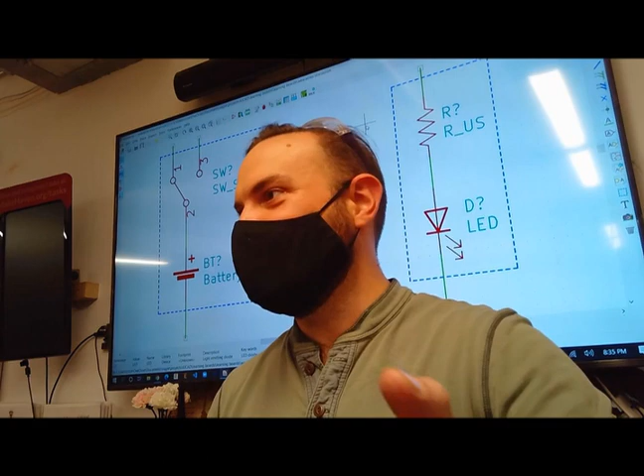Let's consider our coin cell battery holders and LED sequins, and the circuits that go along with them. We've got these different things to talk about regarding what happened this week. If we can see any example projects, it would be great for show and tell, to troubleshoot our way through them and answer any questions at this point.

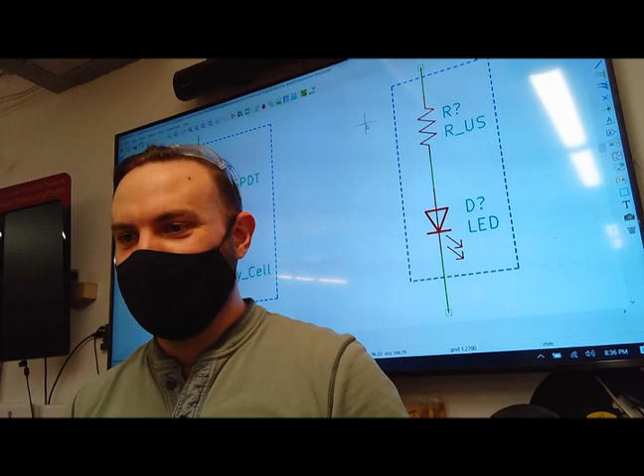We'll see if anybody unmutes, because now I can see who's on the chat. And then, you okay?

Could you give an example of what you mean by that? A preloaded question, like you really wanted to know: okay, I got it wired up and I think I understand what the switches want. Maybe your circuit is not working and you don't know why, and you want to pull up an image and we can troubleshoot it. Or if you had it working and then it stopped and you're curious why that happened. That's what I mean by preloaded question.

Gotcha. Yeah, I might have one, but I think I know why, though I think it's worth talking about. All right, well, you want to come up and ask? We've got one in the room, but then we've got some others that we can talk about too.

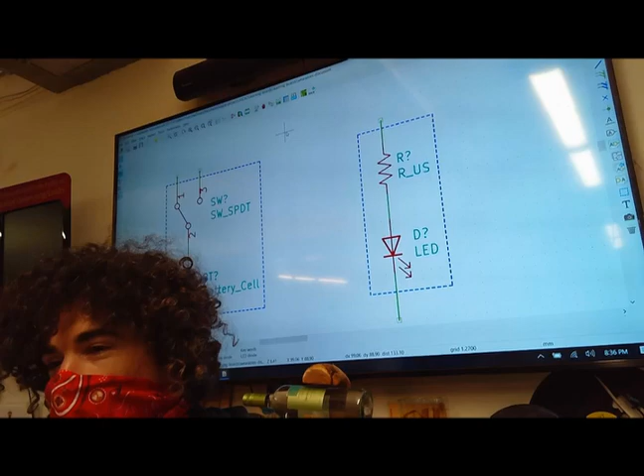I couldn't find my bunny tool belt, which I was going to add a sequin to the eye. So I made this little pride thing with the sequins. I bought some conductive thread, and what I found is when I turn the switch off, it kind of blinks and stays on. So what I think happened is that when I knotted the conductive thread in, the knot is probably also touching the on part, so it's probably hitting it, like just a piece of the thread or something.

So is it spotty when you turn it off? Like if you were to turn it off, does it sort of blink on sometimes? Yeah, like this. See?

Can you see in the video, Jamie is touching it and it's blinking? I think you're totally right, you've got some contact between the switch and the on. So somewhere what you've got is a short circuit that's working in favor of it being on. You've got a connection tied in, and people might be able to see on screen, you're short circuiting it right here, before the switch even happens.

Now I'm scrolling way out. Yeah, I wonder if I could. Yeah, I see the knot right here. It's hitting, see, like right here, you can actually see it. It's most likely when it's turned around and touching, sandwiched between the fabric of my coat and the circuit. It's most likely just hitting it like this, which is actually exactly what I'm doing right now with my finger.

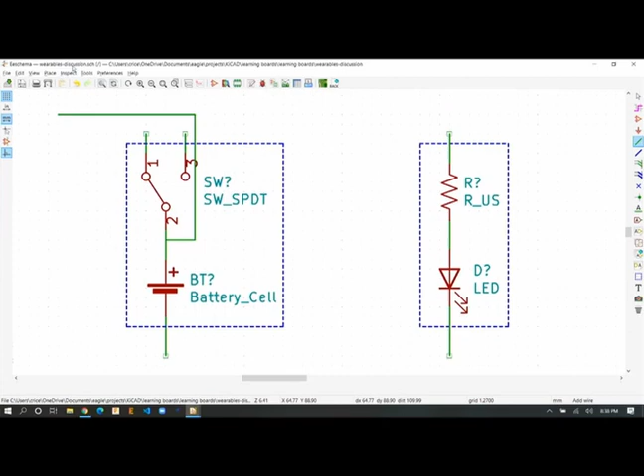Gotcha. So you can see that what you've got going on is this extra green wire coming off the middle, and you've got this extra contact that's accidentally there, and that's what's making it blink. The blink is a really cool effect, but you want to be able to have it be off when you want it to be off. Exactly, and part of the reason why we chose this project is so that we can have exactly these sorts of discussions, to see what's going on.

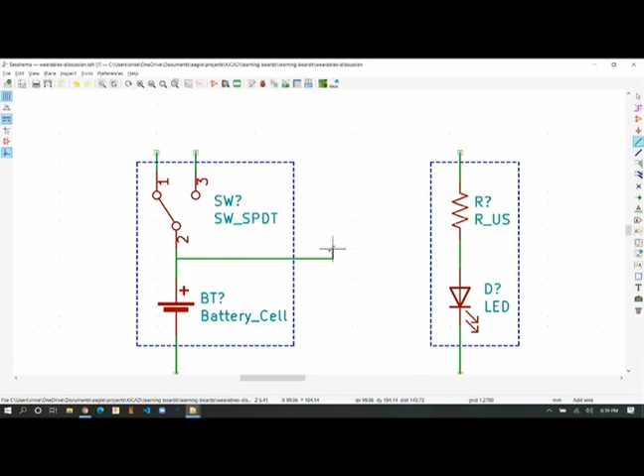Another thing I found is that I sewed everything on with the conductive thread. The only thing I used regular black thread for was to fix the circuit board to the back of the jacket. If I were to do it again, I would sew everything on in the way I want with black regular thread, and then take the conductive thread and do very clean straight lines to the circuit, so I don't waste the expensive conductive thread, and things like this just won't happen, because I could even glue it.

I wouldn't even need to sew it. But yeah, I think that would be just another way of doing it very clean and precise, and have a little bit more control of this.

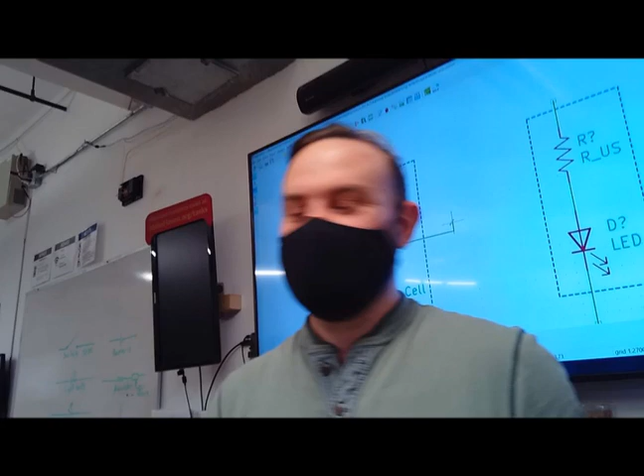Cool, thank you for sharing. And a good workaround for you is to also, you can take the battery out if you need to turn it off. And if you're ever going to, a switch is a great thing. You always want to have a switch and an ability to make a switch work. Anybody else have a question?

Okay, I can pull up my own website here. Should be able to do that. All right. Okay, hopefully you're seeing this now. Yep, we are, seeing my webpage, hooray.

So you can kind of see a little bit in my gallery here, but I'll go down to the actual post about it. Oh, is it going to be slow? Whoops, I clicked on the wrong one. Sorry about that. You're all right. Or did I link it to the wrong one? See if we can get there.

There we go. So I made what I'm calling RT, which is my t-shirt that indicates whether I am feeling extroverted or introverted. It's basically iron-on vinyl, heat transfer vinyl. This was all my trying to figure out Cricut, that was an interesting experiment. This, if you can see, Jamie, is me hating conductive thread.

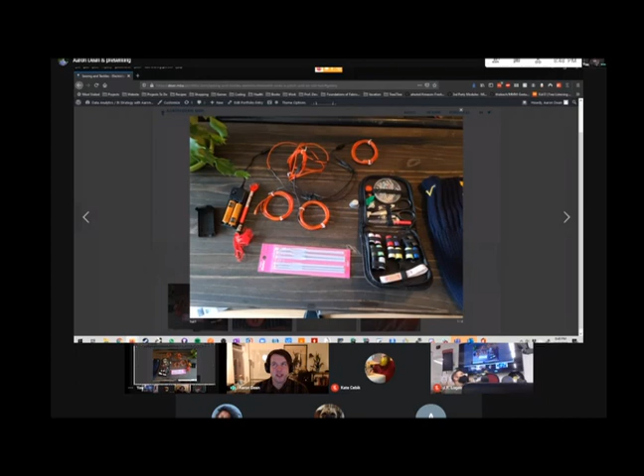And also after seeing Corey's EL wire experiment, actually not experiment, just gorgeous, cool thing, I was like, I want to do something similar. The goal of this hat would maybe be to meet someone else who likes this cartoon as much as I do. So I'll wear this, keep my head warm, and maybe have a fun conversation at some point. So pretty straightforward, but I wanted to get savvy and get exposed to a couple of tools that I haven't really used before.

If I can call crocheting needles tools, I've never used them before, and the knit stitch of the hat made it really easy to do this. I wanted to get some nice embroidery cloth and take a stab at that. But there is something that I noticed that was a mistake. I assumed that the EL wire would play really nicely on the edge of the hat, and then I put it on my large head and noticed that it didn't actually fit.

So I had to adjust it a little bit, and if I could do it again, I would actually put the EL wire not on the edge of the top of the hat and the bottom, but rather on the flat. That way it would be able to actually expand with my head rather than being positioned at the top in a way that might not be visible, because if I put this on my head, sometimes the wire will actually hide behind the lip. So I hope that makes sense. I can put it on my head and show you, but I think that I'm going to do it again and move it.

I totally wouldn't have thought about that, but you're right. What I'm thinking about now is my conversation with Megan about the sewing machine and how a straight line stitch is good for fabrics that don't flex, but the hat has to flex to fit on your head. So now I'm imagining, what if you did a zigzag up and down those ribs around the rim, so that any stretch you want to get, it would just sort of make them slightly diagonal.

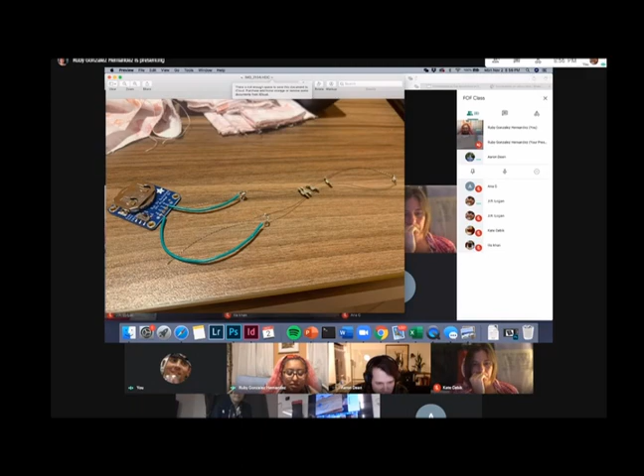I did clip these ends and I did tighten everything, but I think this is too loose for it to actually turn on. I think that was my issue there. I wonder, would the last one turn on, but not the middle ones? Did you ever see that happen? None of them would. I feel like when I first did it, the first one kind of flickered, but nothing. I wonder if I should have just double knotted each one, or just had it tighter. Do you know what I'm saying?

Yeah, I do. I think that with conductive thread, it's often about the contact that you've got. So tying the knot so that you've got good contact is tricky. But just from looking at what you've got there, it looks like your circuit is wired correctly. It's just got contact issues. So it seems like you're on the right track totally, but tying it down more aggressively, like Jamie had said, making sure that it's really attached to the piece, and then using the conductive thread to make a really tight loop so that you've got contact might make the most sense.

Or if you want to have a semi-rigid thing that you can move around in your mask or on your purse, it may make sense to just use wire also.

I also noticed that, like, while I would. Oh. She can't hear you. She can't hear you. Come on up.

I also noticed that when I was sewing these together, another reason why I would do the black thread first and then a clean line for the circuits is because I also short circuited, in that the wires would touch for each of these, which would then just shut it down completely and it wouldn't work. So I had to cut some off and start over again, and do it so that each wire to each sequin was not touching any other sequin or wire or anything. It all had to be cleaner, so that's why I would do it that way again, to make sure there were no wires crossing, like the Ghostbusters say, don't cross the wires.

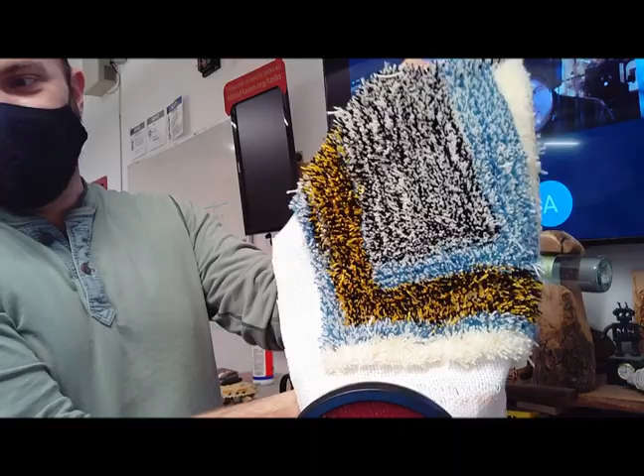No, this is totally working. The back is really nice and neat, really clean, straight lines. The tufting came through, it cut them on this side. So it was awesome to see the two of you working together to really make this gun into something that works. It'll be awesome to see how this develops as a skill, where people make their own bathroom rugs. How long did it take to make that? That gun goes so incredibly fast, even on the slowest speed. You could probably whip that up in less than 10 minutes. You said whip it up, so it must be a pretty easy, fast process.

The hardest part is the thread keeps falling out of the gun, because there's really nothing pulling it in. You have to have the yarn in a rig where it's just flowing smoothly with no interruptions whatsoever. It's very particular, very picky.

Do you want to start like a fast carpeting team or something? Like some competitive tufting? Speed runs.

I bought foam cones from Joann Fabric, and I stuck it on my drill today, and I took an entire spool of yarn and put it in there, and it worked. I have 2 foam cones, and it worked. I'll show you them, and it worked.

I think it would work even faster if you and I did it together. We're gonna get video of that, we're gonna get it working. We have a series on Instagram of several MakeHaven posts of putting things onto drills to have them do other things, and that was just like that.

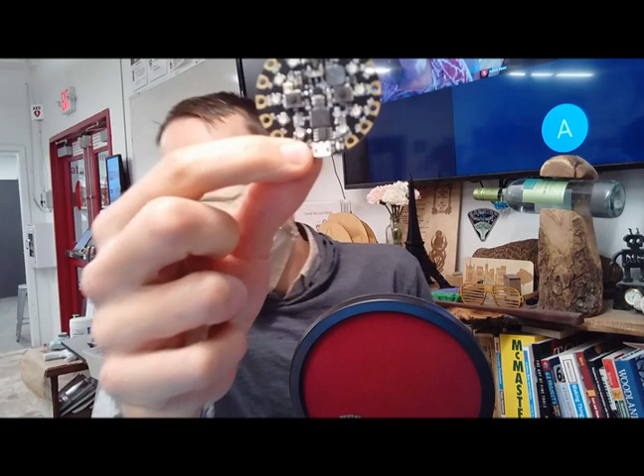So I've successfully completed the step of procuring a circuit, but Corey's been coaching me through what I might do. I bought this Circuit Playground, which is a small chip that has on it a number of different things - I think 10 different LEDs, a bunch of different connection points, both analog and digital. It has a thermosensor, which is what I wanted it for primarily, so it can take temperature readings, but it also has a small speaker on it. It can receive infrared signals, so you could theoretically control it with a remote control.

My idea was to put this on the coffee cozy that I had made last week, and then it would be able to read how hot the coffee was, and use the LEDs on here to somehow display that. But that'll require some coding that Corey will help me with. The code for that is a really neat process.

Am I still upside down? Yeah, I don't know what's going on. That's all right.

So I'm pulling up on my computer the Circuit Playground Express, and it's a really neat platform. It's built to be a learning platform, and the example of it up here has - oh, maybe it's not up on the screen. We're trying to do some technical wizardry. But I can drop this into a Slack chat so that you can see and scroll through it.